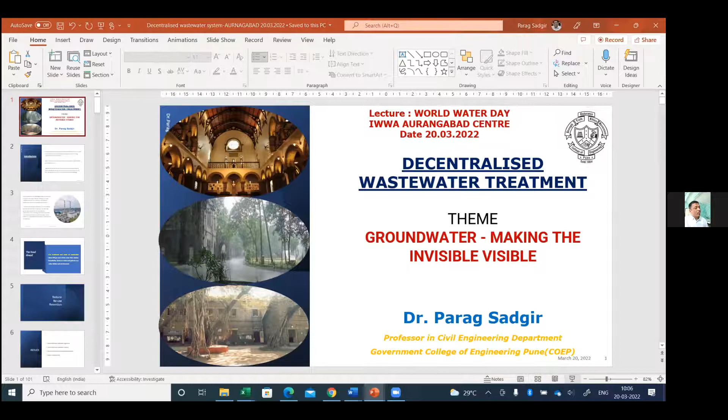He has guided 24 students for ME and MTech dissertations. Total number of journal and conference publications are 132. Such an eminent personality is with us. He also has one patent to his credit.

He has worked as an editorial board member of IWA Journal, and is working as an editorial board member of the Journal of Chemistry and Environment. He has been an executive council member of the Indian Water Works Association since 2006. He is a chartered engineer, life fellow of IEI, IWWA, IWRS, IWRA, IAH. He is also a member of ISTE, IWA, and worked as a member of the Board of Study in Civil Engineering at Dr.

Babasaheb Ambedkar University, Aurangabad. Presently, RRC member of Environment Science BOS of the University of Mumbai and MGM University, Aurangabad. He is reviewer of 7 international journals. He has organized 5 national conferences, workshops, and 1 national level ISTE short-term training program. He has 5 edited books and 1 book chapter to his credit. He has delivered 15 keynote and expert lectures in different areas. He has worked as a session chair for 11 national and international conferences.

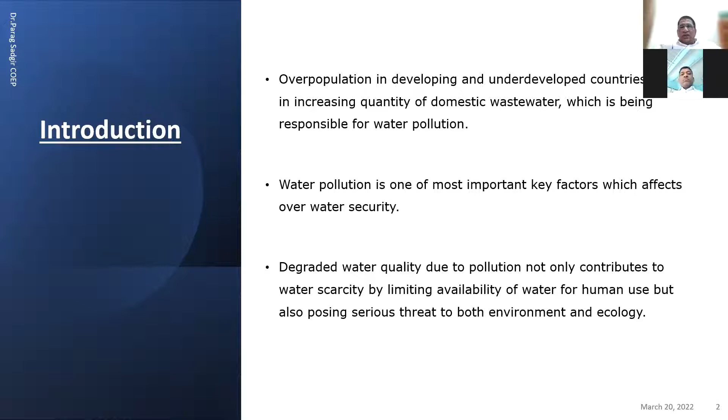Presently, if you see any river, we are able to observe that it is polluted. So we have degraded water quality, and it is also affecting the groundwater resources. So there are various recent technologies we are trying to use for the treatment of that.

Now the new trend, coming from the last 10 years, is to treat that wastewater for non-potable uses like flushing, floor washing, gardening, agricultural, landscaping, construction, road cleaning, recreation, due to the water shortage, so that it will reduce the water pressure on groundwater withdrawal, allowing room for recharge.

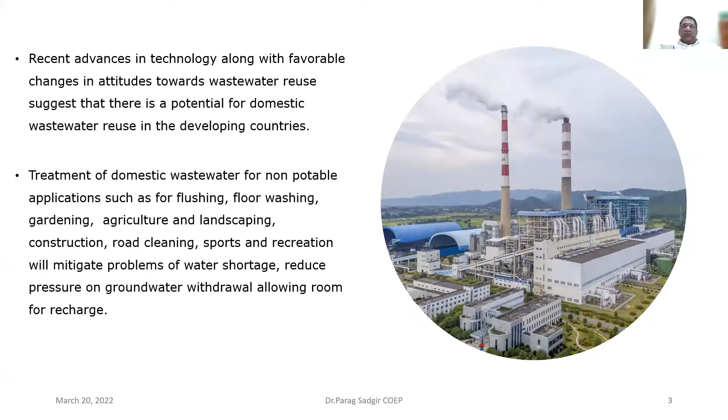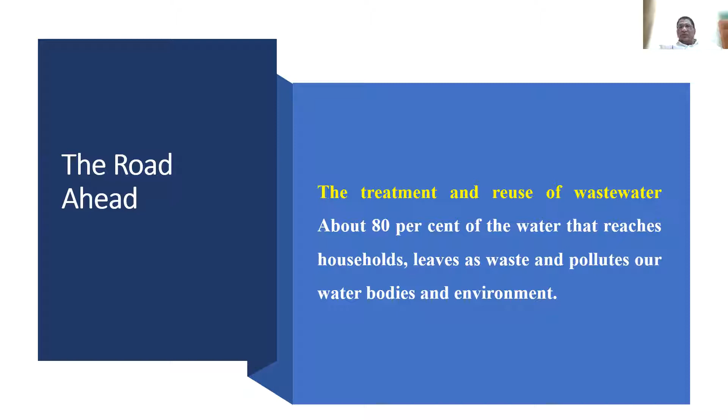If you observe, from the last 50 years the groundwater level has drastically gone down from 50 feet to 300-400 feet. So the treatment and reuse of wastewater is important—about 80% of water that reaches the household ends up as waste and pollutes our water bodies and the environment. So we have to reduce, reuse, and retain.

This is the main fundamental principle. If we follow it, then we will be successful in reducing this pollution and conserving our groundwater sources. In reduce, we have to reduce the freshwater demand in agriculture. If we use this treated wastewater, obviously it will reduce the freshwater demand.

Reduce the freshwater demand in industry. Similarly, if we reuse the treated wastewater, it will also reduce freshwater demand, and reduce freshwater consumption by households.

Practically, for urban areas, we require 135 LPCD—liters per capita per day. Out of that, only 40 to 45 liters are required for potable purposes. Whatever else we are using is for non-potable purposes. For that, we can use properly treated wastewater, which will reduce freshwater consumption.

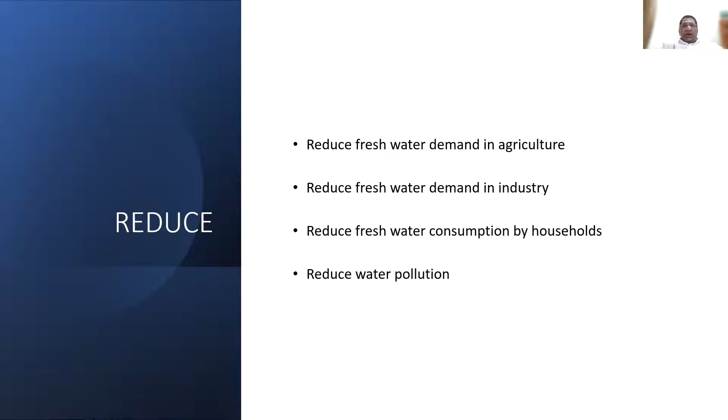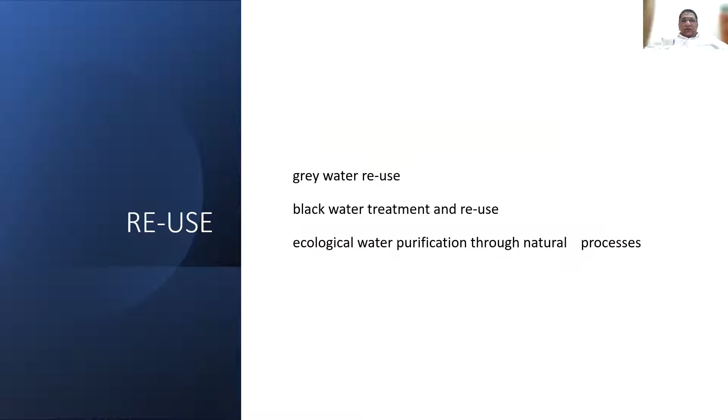Similarly, we have to reduce water pollution. Grey water reuse is also something we have to think about, along with black water treatment and reuse, and ecological water purification through natural processes.

Then retention: upstream investment in natural infrastructure like wetlands and forests. Water storage projects like above-ground reservoirs and rainwater harvesting. Underground aquifer storage and recovery activities. Increase the water retention of the soil so that agriculture will need a lesser quantity of water.

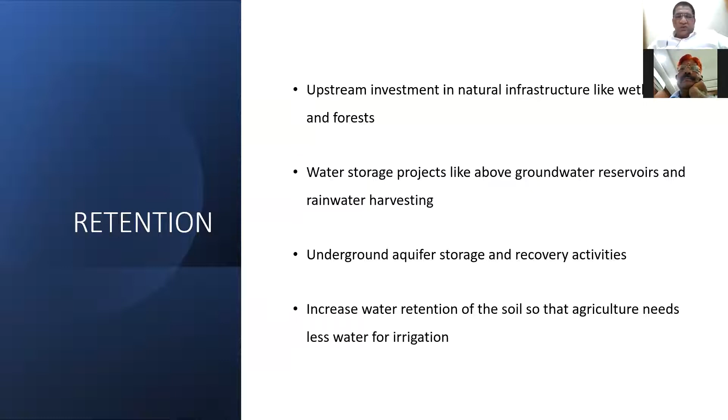So the major factors affecting the wastewater system are population growth. Urbanization has changed from 28% in 1947 to now increased up to 48%, and the day will come when it is more than the rural areas.

So instead of urban and rural, peri-urban population is increasing, which is having the scarcity of all the facilities, just like wastewater treatment or proper water quality. So wastewater composition, discharge, and the enforced effluent standards are now regulated by NGT.

In the last year only, the National Green Tribunal has changed the effluent wastewater quality standard from 20 mg per liter to 10 mg per liter. They have made the standards more stringent so that we are able to maintain the water quality of the rivers. The demand for effluent reuse in urban and agriculture sectors is there, along with location, required qualities, and potential quality.

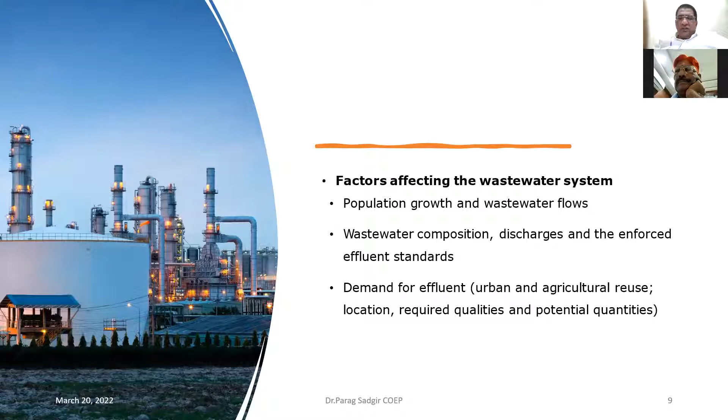The typical composition of untreated domestic water contains main factor BOD at 220 mg per liter, and total solids at 720 mg per liter. Other nitrogen, nitrite, and phosphorus are also present.

As per our standards, now we have to reduce the BOD to 10 mg per liter. This means it is a Herculean challenge to remove or reduce 210 mg per liter from every liter. Similarly, the suspended solids have to be reduced from 220 to 10, again, 210 mg per liter.

Coliform quantity is also high. When we are talking about reuse, we have to remove all these coliforms as well.

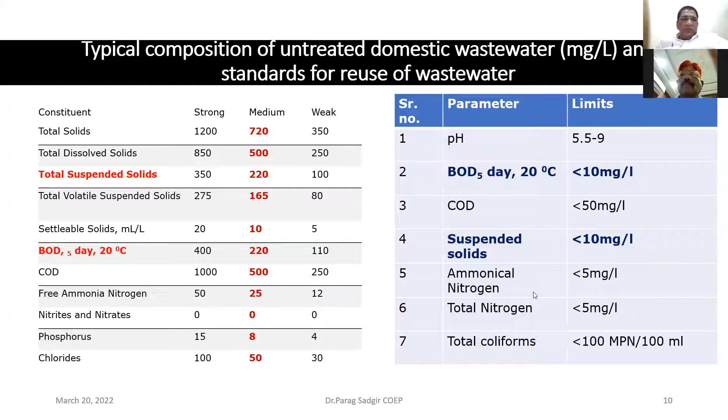So in the conventional treatment system, we are removing organic matter and nutrients, but there is eutrophication, fish kill, odor problems, and more space requirement.

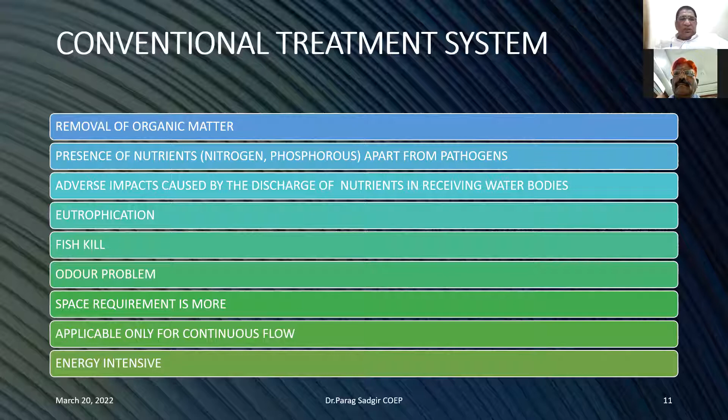Up till now, for urban areas, we are using centralized wastewater systems. This approach involves collecting all the wastewater from the whole area and transporting it. Whatever our drainage systems or drainage schemes are, out of that, more than 65% of the cost goes for transportation of the waste only. The treatment part is just 25%.

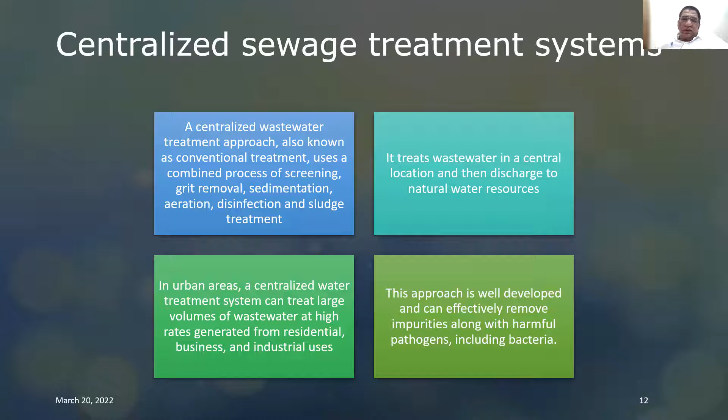Instead, if we talk about decentralized wastewater treatment, we are able to use efficient treatment for daily wastewater flows up to 1000 meter cube or 1 MLD. Now we can go up to 5 to 10 MLD also by using the proper methods.

They are tolerant toward inflow fluctuations, reliable and long lasting. Maintenance of the sewerage system is easy here, with low maintenance cost, and expensive sophisticated maintenance is not required. So the quality of treatment is more efficient

than the traditional system. Treated water can be effectively used within the sector. Groundwater recharge is also possible. Less investment is required as compared to the major centralized systems. System construction results in less environmental disturbance, and system expansion is easier.

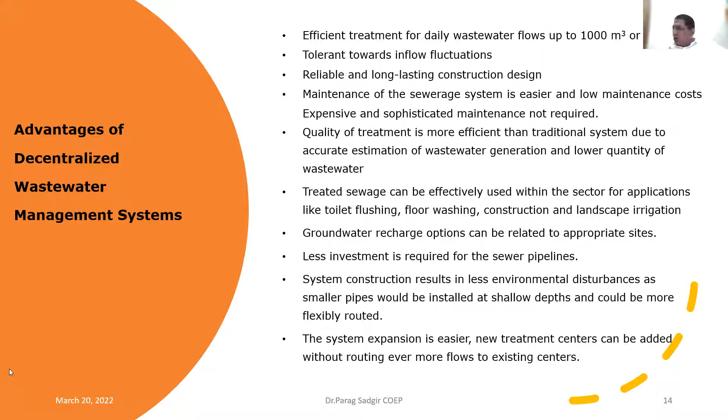So in short, decentralized means we are able to provide treatment plants for small areas. In any urban area, everywhere we provide 10% space reserved for the garden and such things. So these decentralized wastewater systems we are able to provide in the garden area only, and on top of that, we are able to provide the gardens. This helps by using that particular treated water for gardening as well as for roads and other purposes like construction.

The only disadvantage is that a large area is required as compared to the quantity treated. If it is not properly treated, there is a potential threat to groundwater quality. There is no dilution benefit, and the risk of failure is concentrated in that particular area. It requires great awareness and participation of the stakeholders.

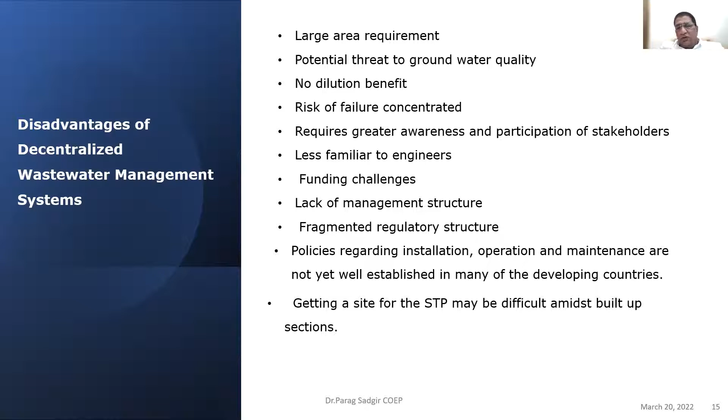It is less familiar to engineers. Funding challenges are there, along with lack of management structures, fragmented regulatory structures, and policies that are not yet finalized. The government is trying to make rules and regulations for this. In thickly populated areas, it is difficult to get a site for the STP, because everybody wants the waste treated, but nobody wants the STP next to them. So that is the problem in urban areas for decentralized wastewater treatment.

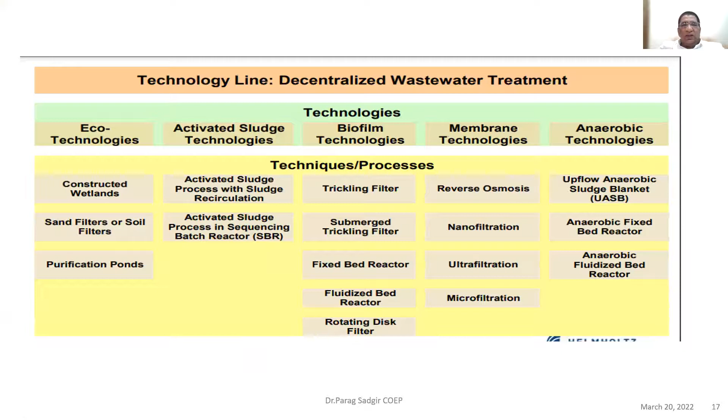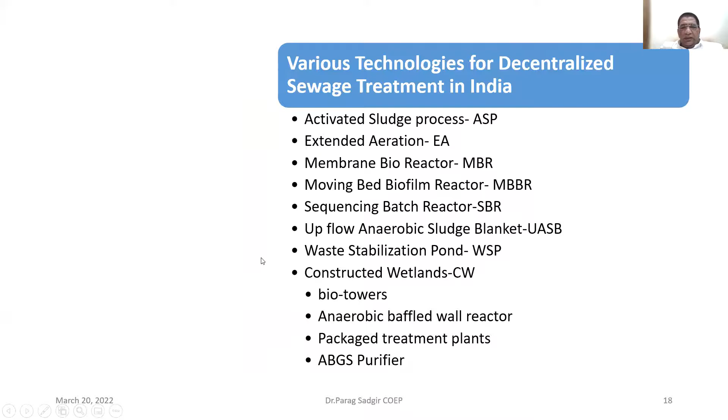Various technologies we are able to use are activated sludge process, extended aeration, membrane bioreactor, moving bed biofilm reactor, sequencing batch reactor, upflow anaerobic sludge blanket, waste stabilization pond, constructed wetlands, biotowers, anaerobic baffled reactors, package treatment plants, and the ABGS purifier.

The very popular one is activated sludge process. It started in 1914 in England, and afterward various modifications have been done in that. If we talk about the activated sludge process, this is the aerobic biological sewage treatment.

In this, there are two types of systems we are using in the secondary. In the preliminary, we are taking the screen, grit chambers, skimming tank, and in the primary, we are using the primary settling tank. And in the secondary, we are having various options.

In the biological, there are two options: one is attached growth system, second is known as suspended growth system. The activated sludge process is the suspended growth system.

In this, we have to supply oxygen, and it requires large electrical energy. Normally afterwards, whenever it is for the municipal corporation or municipal council, they try to reduce this electrical consumption, and they are not using that. So we are not able to get the required quality of effluent at the end.

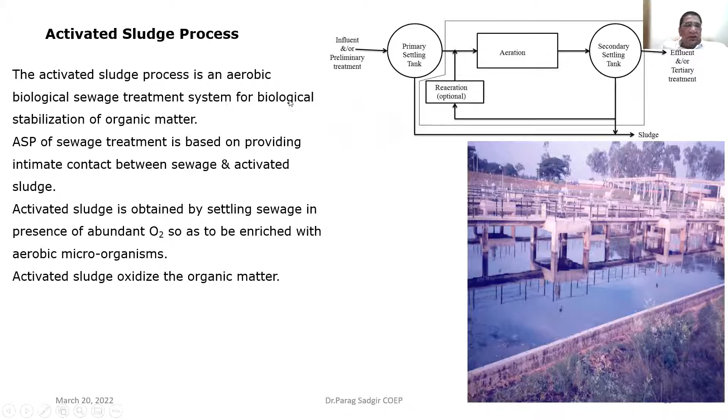It is advantageous if properly maintained and properly used; it gives good effluent quality. The process requires a small area of land, removal of BOD and bacteria is around 90%, and there is low cost of installation. Disadvantage is that sudden change in characteristics will adversely affect the quality.

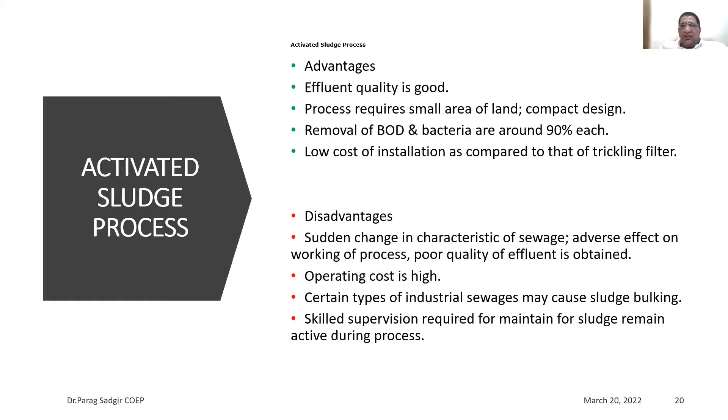Operating cost is high. Certain types of industrial waste may cause sludge bulking, and skilled supervision is required.

Then extended aeration is there, that also we can use.

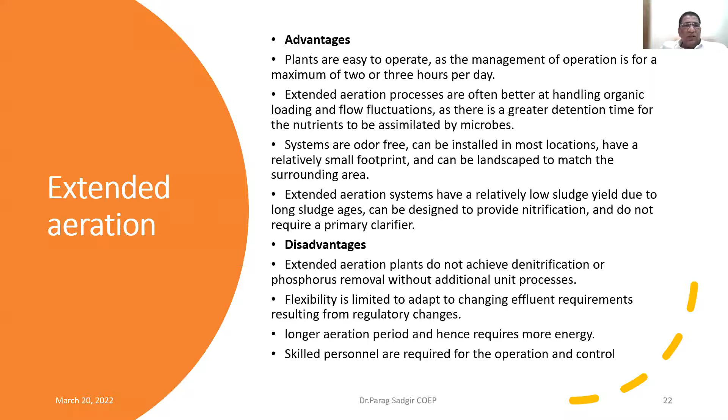Nowadays the popular one is the membrane bioreactor. It requires less space, and it is activated sludge process combined with membrane separation process. We are immersing the membranes in this one, and the reactor is operated similar to the conventional ASP, but without the need for secondary clarifier and tertiary treatment steps like sand filtration.

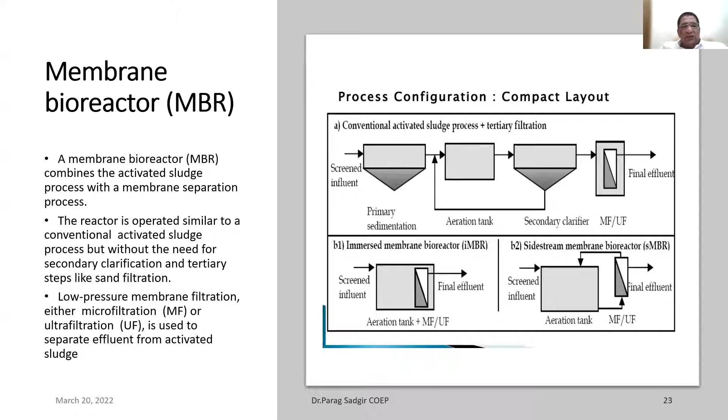So we are using low pressure membrane filtration like microfiltration, ultrafiltration, used to separate the effluent. In this membrane bioreactor technology, we are providing the membrane, and it obstructs pollutants from traveling to the other side, cleaning that one.

Advantage is it eliminates secondary clarification, high volumetric loading, shorter HRT (hydraulic retention time), and lower volume is required. Longer SRT (sludge retention time), and less sludge is produced.

Operating at low dissolved oxygen concentration, and there is potential for simultaneous nitrification, because nowadays the limit given for nitrate is also 5 mg per liter. So it is necessary to treat that also.

High effluent quality: we are able to get 95% COD reduction, 98% BOD reduction, 99% suspended solid removal. Less space is required. It is suitable for reuse after following disinfection and other treatment.

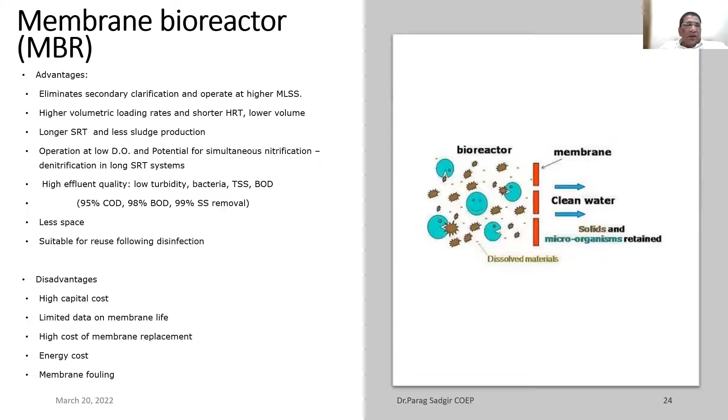Disadvantage is high capital cost, limited data on membrane life, so we have to change the membrane after a certain time. It has high cost of membrane replacement, and energy cost is there.

Normally we are using two types of membranes: one is hollow fiber, another one is the plate membrane.

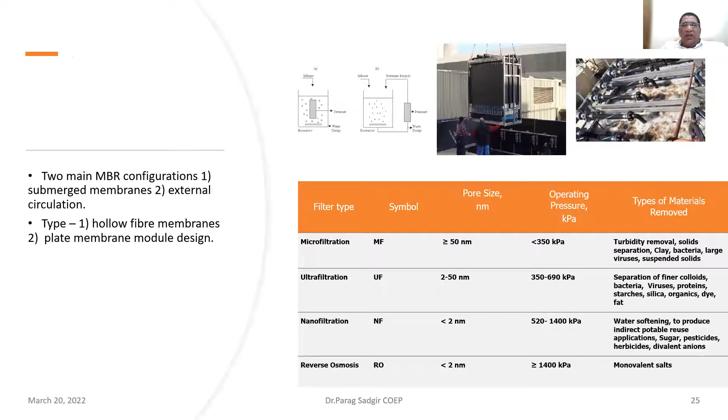After MBR, an alternative is the MBBR, that is the moving bed biofilm reactor. In this particular tank we are putting that media. This is the combination of extended aeration as well as the floating biological reactor, meaning suspended and attached growth system. As in the trickling filter, we are using the attached growth system.

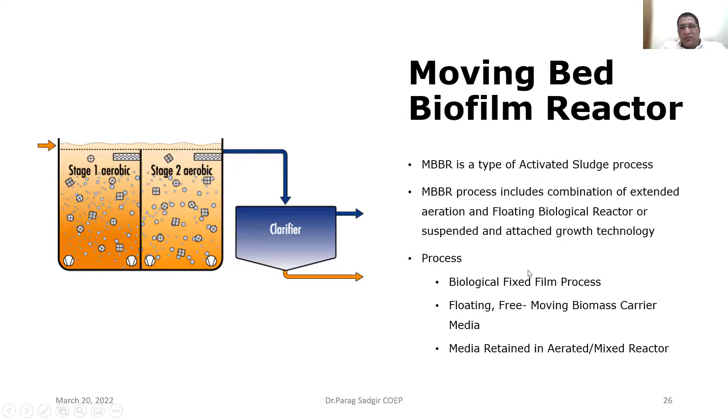So that particular technology is used. This combination is made in the MBBR, moving bed biofilm reactor. We are using biological fixed film process, floating media retained in the aerator. This is the combination in the aeration tank.

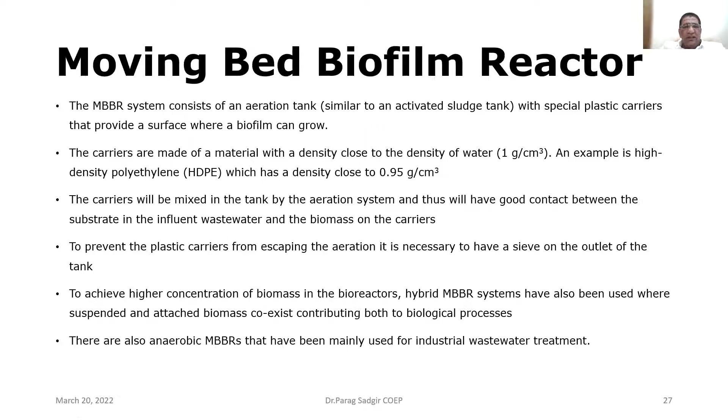In the ASP process, means aeration tank only, we are putting this plastic media, and it is increasing the efficiency of that one. Advantage is higher SRT, which is favorable for nitrification.

It responds to load fluctuations without operator's intervention. Lower sludge production, less area is required, and resilient to toxic shocks.

Disadvantage is manual bacterial monitoring is required, an operator is needed, and some insects may get attracted.

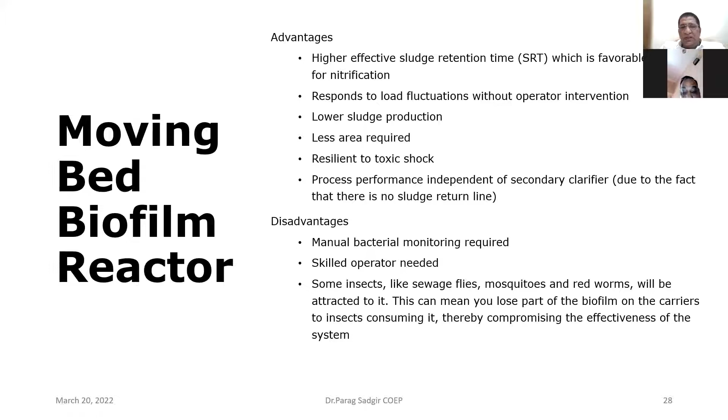Now again, due to the NGT, modifications have been done in these particular effluent standards, that is from 20 to 10 mg per liter, and nitrate 5 mg per liter.

Municipal corporations and municipal councils are trying to modify their existing sewage treatment plant, the ASP, into a sequencing batch reactor, because in the same construction they are able to double the capacity due to increase in population. Nowadays as population increases and urbanization increases, land availability is very less.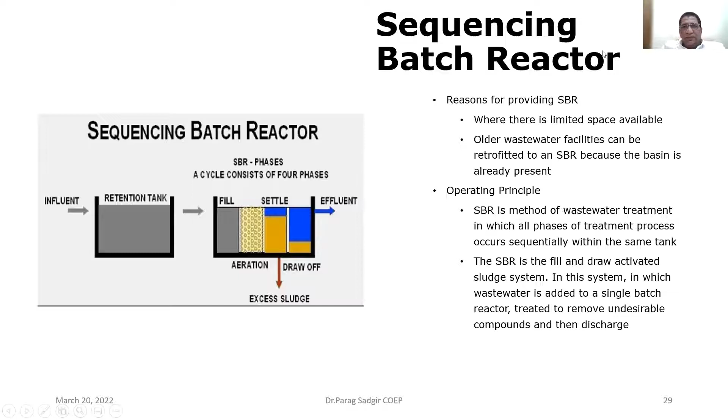In this particular system, first we fill the tank, the particular compartment, then we provide aeration for the particular period. We allow it to settle and decant. This is a batch process - fill, react, settle, and decant - we are able to treat the wastewater.

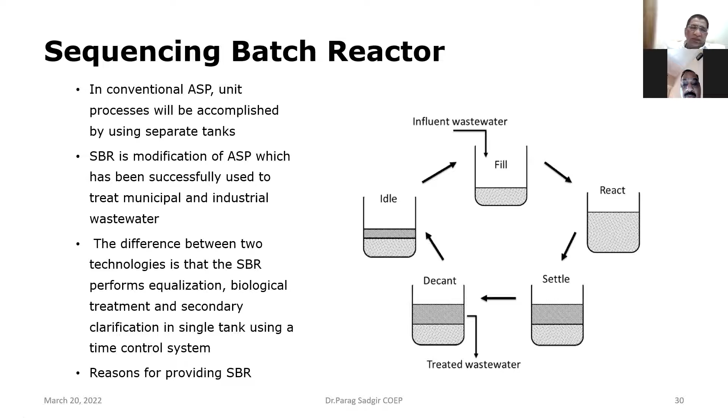The difference between these two technologies is that SBR performs equalization, biological treatment, and secondary clarification in a single tank - in the same aeration tank we are able to provide all of these using a time control system. The advantage of SBR is equalization, primary clarification, biological treatment, and secondary clarification.

SBR requires small space, it is a controllable reactor time, and has minimal footprint with high nutrient removal capabilities. BOD removal efficiency is 85 to 90%.

But the limitation is that it requires a higher level of sophistication. If we want to provide automation, then the sensors and all that cost will increase. Higher level of maintenance is required, and potential plugging of the aeration devices is also a problem.

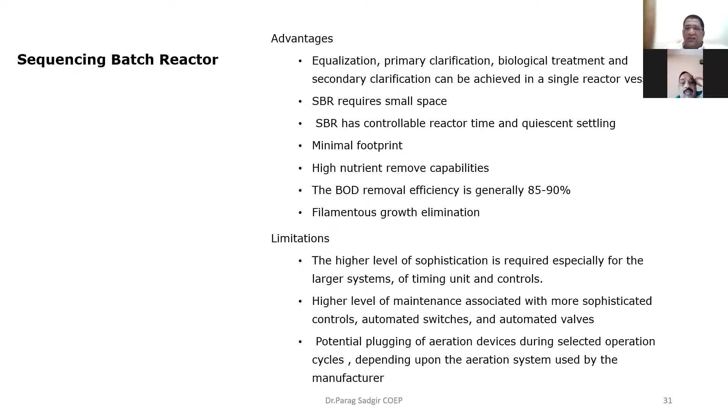Then UASBR is there, that is the anaerobic process used if we want to produce energy by collection of biogas. Nowadays Praj Industries and other industries have developed models so that by using this, they are able to produce electrical energy as well as CNG.

That is compressed natural gas. Up till now, the concept was that whatever we are doing in wastewater treatment means we are wasting money, because the municipal local bodies are not getting any return from that. But by using technologies like UASBR, they are able to get some returns in terms of electrical energy or CNG.

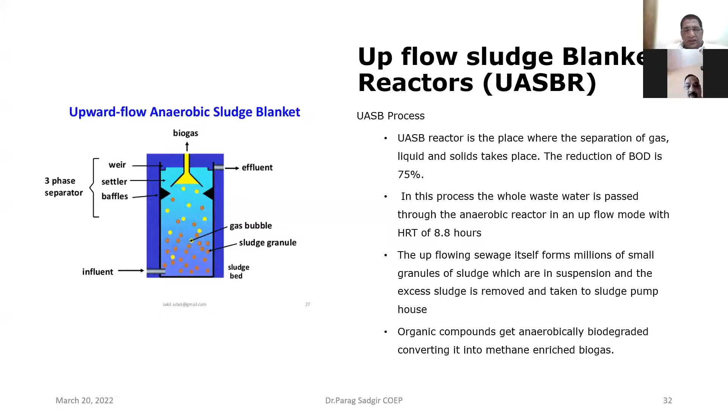So due to that, it is getting more popular day by day. The advantage of UASBR is it produces easily dewaterable excess sludge, low energy consumption, absence of noise and odor nuisance. It is a proven technology with low initial investment and maintenance cost. Methane-rich biogas production is there, and it produces enriched nutrient sludge which can be used as fertilizer.

A longer startup period is a disadvantage, along with lower performance at very low loadings. It is difficult to maintain the UASB because we have to maintain pH, alkalinity, and temperature properly. Only then are these methanogenic bacteria able to produce maximum efficiency of biogas, meaning methane gas. We also have to provide separators so we can collect the methane gas separately.

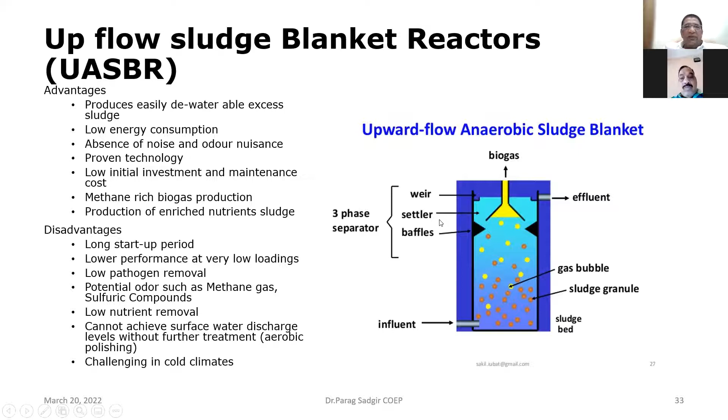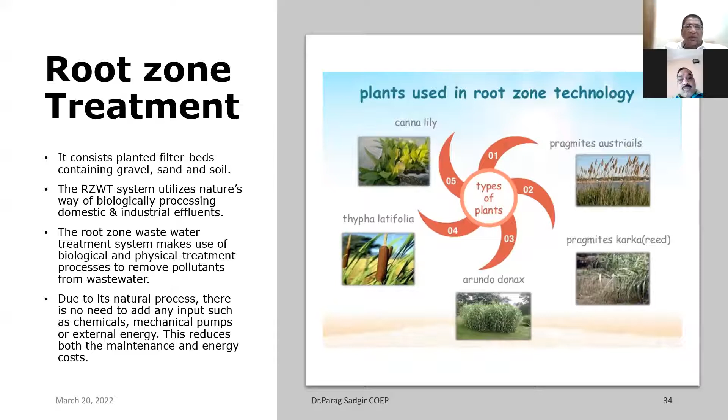Then in decentralized treatment, we are able to use root zone treatment. If more land is available, this type of treatment is preferred. It is a natural process with no mechanical or electrical part. Its retention time is more. It is settling, anaerobic baffled - we do pre-treatment, then anaerobic baffled reactor, anaerobic filter, and planted gravel filter.

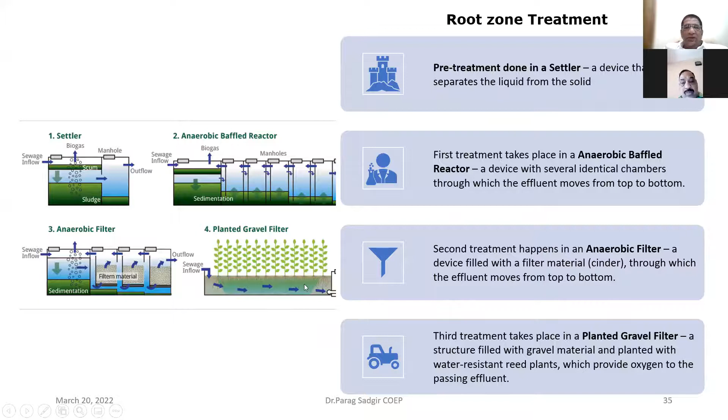There are comparative advantages: capital cost is less, construction bed is simple, system requires little or low maintenance. It is a robust process, able to withstand, and gives consistent quality of treated wastewater.

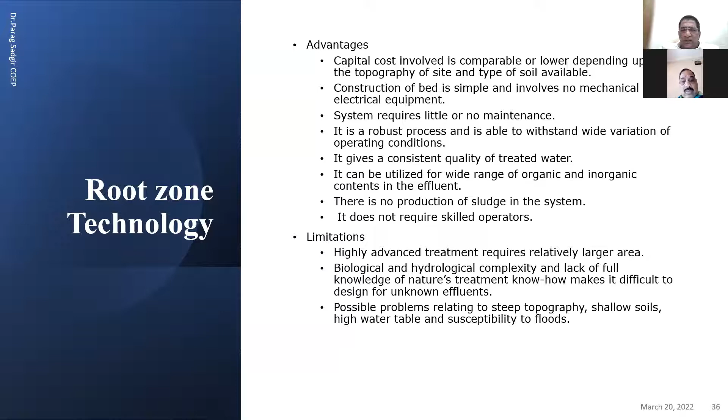The limitation is that highly advanced treatment requires relatively larger area, and knowledge of nature treatment know-how is difficult to design for unknown effluent. For domestic sewage, we are able to make that work. Possible problems include steep topography, shallow soil - it again depends on the infiltration rate of that particular area.

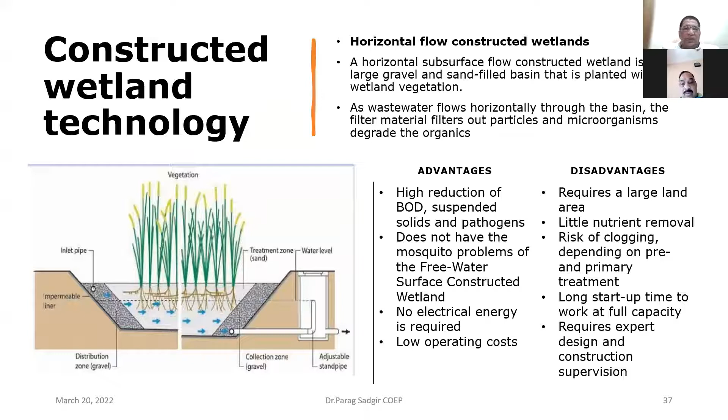Then we can use constructed wetland technology also for that. There are again 3 types: surface, subsurface - subsurface, and surface.

In College of Engineering Pune, they have actually implemented this particular technology, the NaWaTech DST supported project for this. This is an anaerobic system as a gravity flow system, which does not require pumping. They have provided this vertical flow wetland of capacity 140 cubic meters, and the treated wastewater is used for gardening as well as flushing in the hostel blocks.

It is user-friendly, low cost operation and maintenance, with consistent treatment performance. It was established in 2016, so now 5 or 6 years have passed. No skilled operator is required, no chemical is required, no electricity is required.

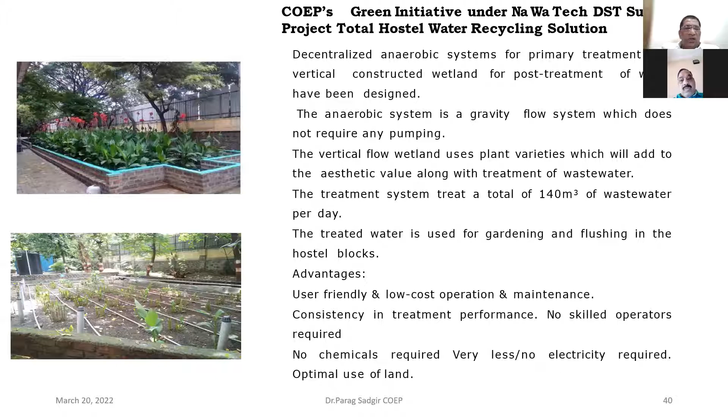Then I have developed one technology that we have given the name ABGS. We have got the patent for that.

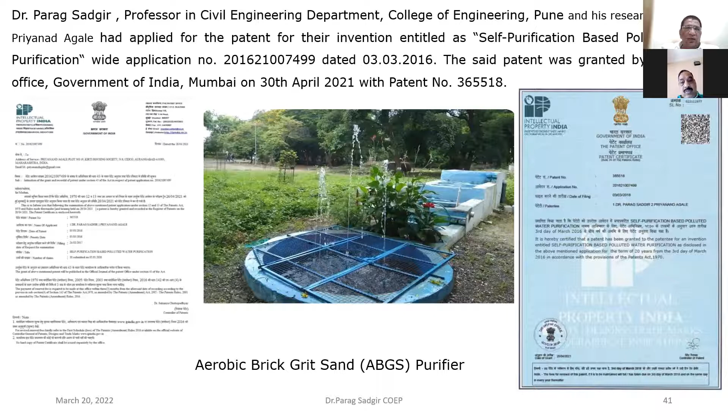In this technology, we are particularly using these components, that is the equalization. We are using locally available media, that is brickbat, grit, sand, and charcoal, plants like Canna indica, and aeration is done.

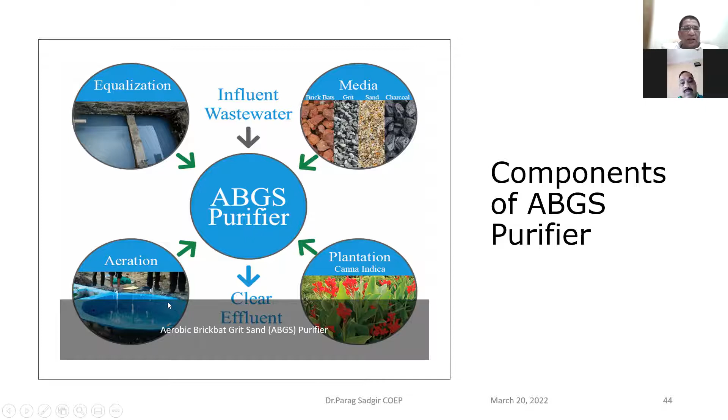In this, we are able to use brickbat, sand, hydra plants, coconut coir, neem coal, and grit. We have tried these various media and found that brickbat and sand are giving the good results.

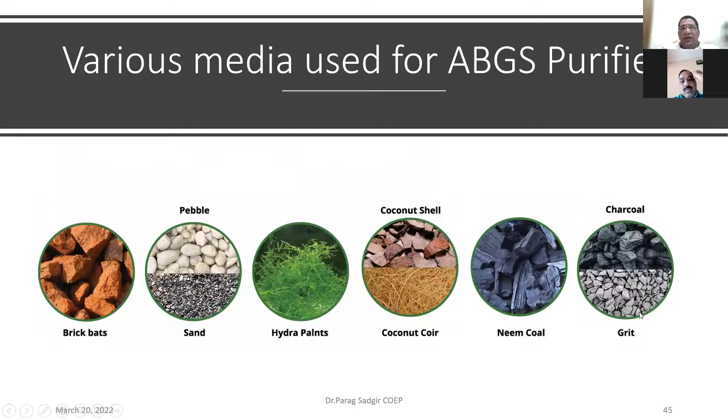This is the pilot scale model we have, and we are able to get this quality, as you are able to see in the picture. This is the actual pilot plant we have established in College of Engineering, Aurangabad.

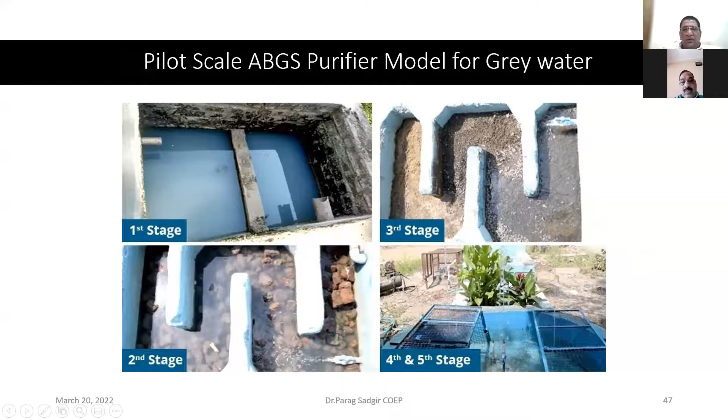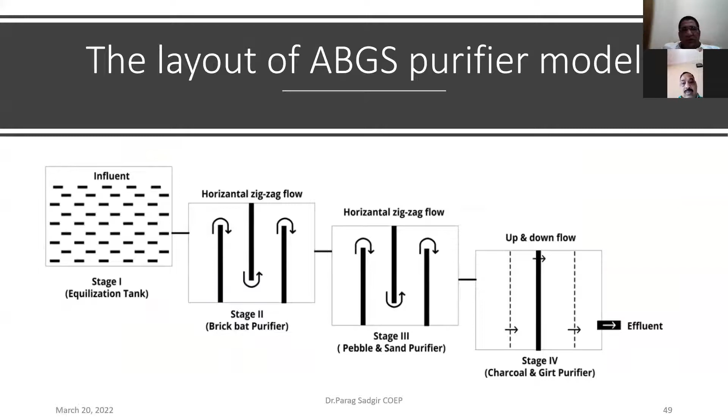The same system we can use for the nalas or streams or small rivers, so that we are able to purify that particular wastewater.

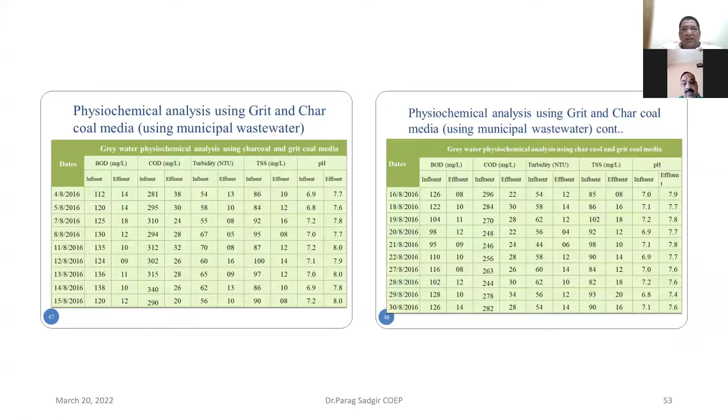So these are the results we have found out. This work is done by Mr. Agrawal in his PhD work. BOD removal is 89%, COD 90%, total suspended solids 85%.

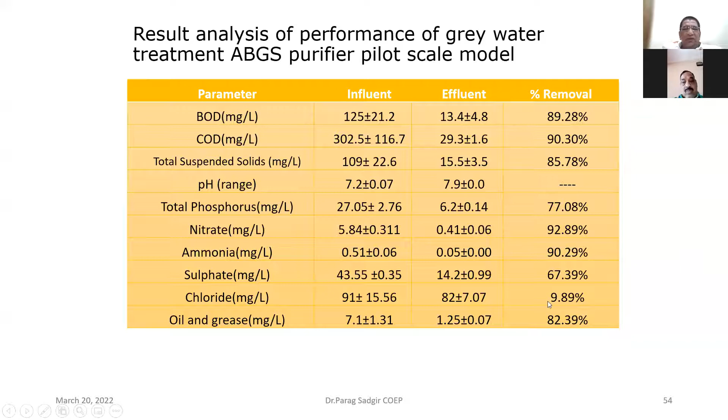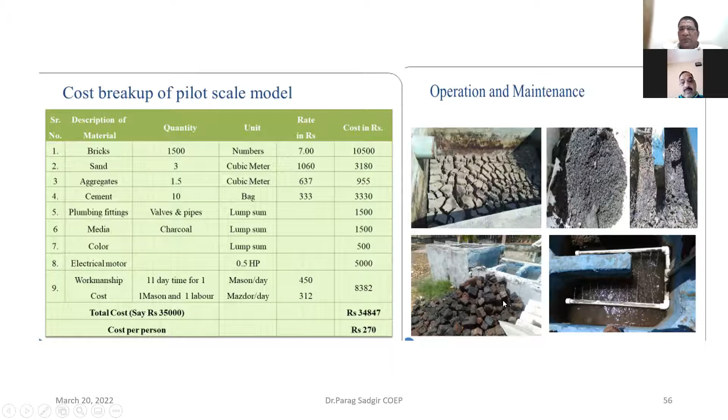So we are able to get good results in this. For operation and maintenance, after 6 months we only have to remove whatever waste has collected from the equalization tank, and we are able to form bricks from it, which we wash only after 6 months and then reuse. Similarly for the grit and sand also.

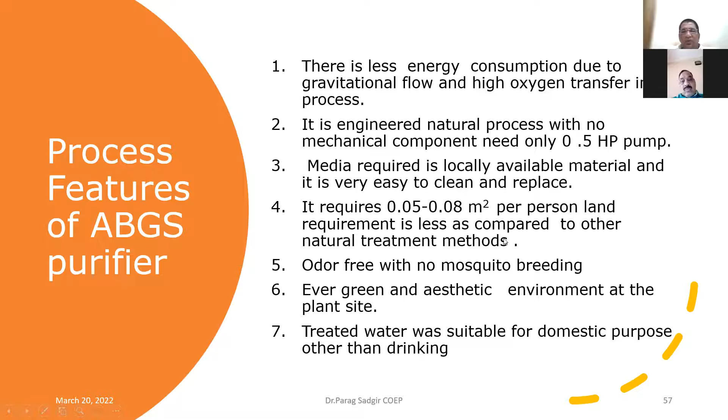There is less energy consumption due to the gravitational flow. We require only a 0.5 HP pump for electrical energy, and no mechanical part is there. Whatever media is required is locally available, and area requirement is also less, that is 0.05 to 0.08 square meter per person. Land requirement, odor-free, evergreen aesthetic environment is there. The treated wastewater is suitable for domestic purposes like gardening and other than drinking purposes.

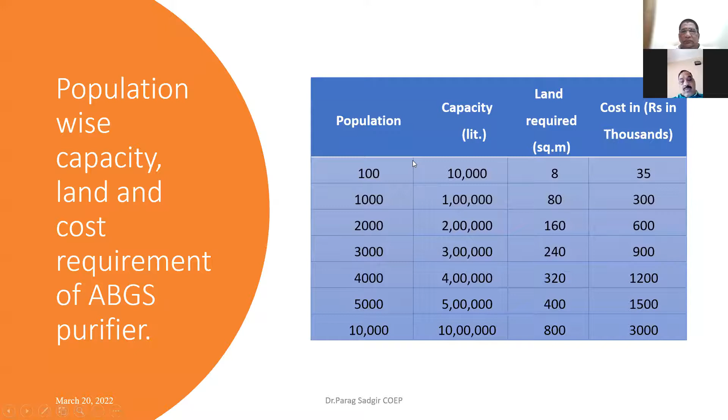The performance is compared with all these. Though it is removing in the primary and secondary stages, we are removing 90 to 99%.

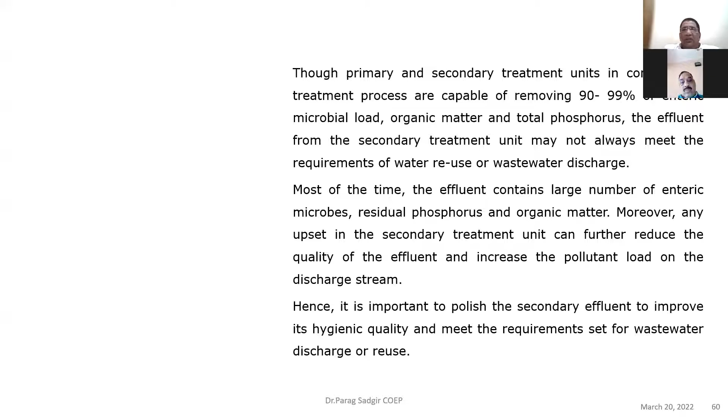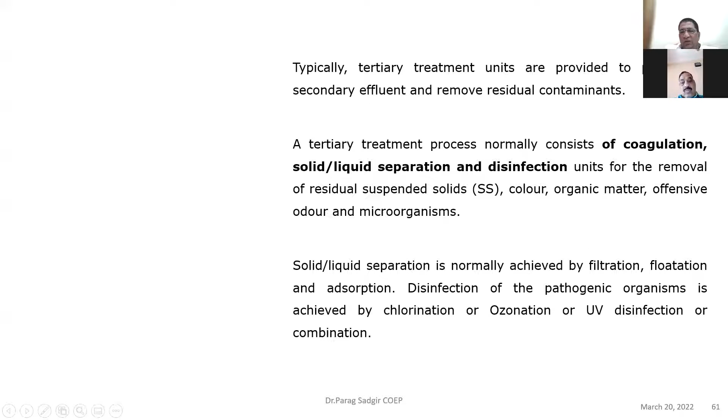If we want to reuse that water, it is necessary to give tertiary treatment. In the tertiary treatment, we have to give coagulation as well as solid and liquid separation. Disinfection is required, so we are using filtration, flotation, and adsorption. Disinfection is done by chlorination, ozonation, and UV disinfection.

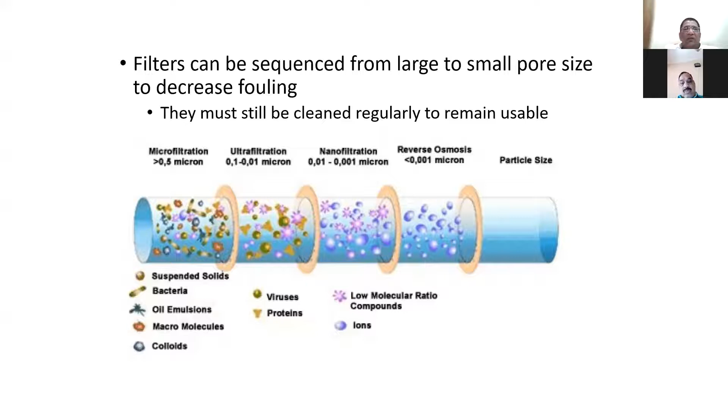So whenever we are using separation, if the suspended solids are greater than 0.5 micron, we have to use microfiltration. If it is between 0.1 to 0.01, we use ultrafiltration. If it is 0.01 to 0.001, we use nanofiltration. And if it is less than 0.001, then we have to do reverse osmosis. Depending on the solid size, we can select which filtration is required. This chart shows which treatment to give and when.

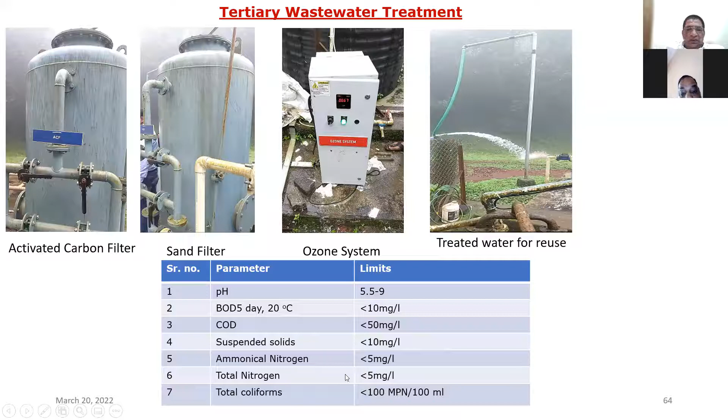BOD is less than 10 mg per liter, COD less than 50 mg per liter, suspended solid less than 10 mg per liter. Ammonical nitrogen is also less than 5 mg per liter. Total nitrogen is less than 5 mg per liter, and total coliforms are also less than 100 MPN.

So when we are selecting the technology, which technology we can use, we have to consider cost, operation and maintenance, advantage, disadvantage, relative cost, and cultural acceptability and suitability. So we have to think about these factors.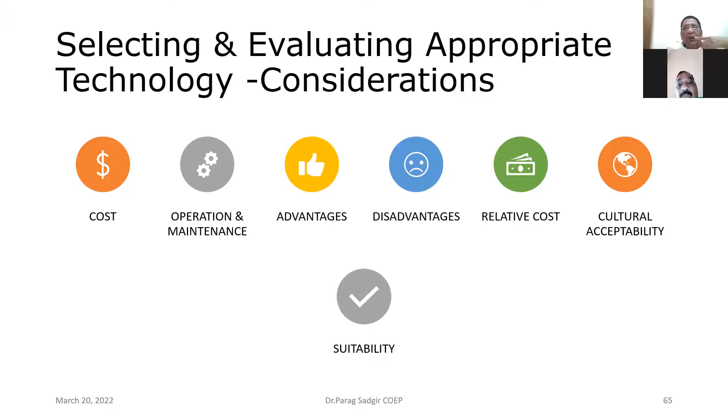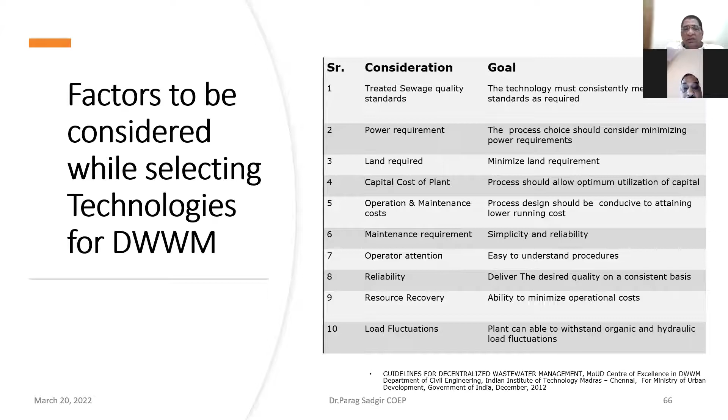Whenever we are thinking about this, what is the quality of treated wastewater we require, what is the power requirement, what is the land requirement, what is the capital cost available, what O&M we are able to give, what is the maintenance requirement, how we are able to maintain it, and operators' attention, whether it is easy to understand or not, whether it is reliable or not, whether resource recovery is there, and the load fluctuation, whether it is able to withstand load fluctuations or not.

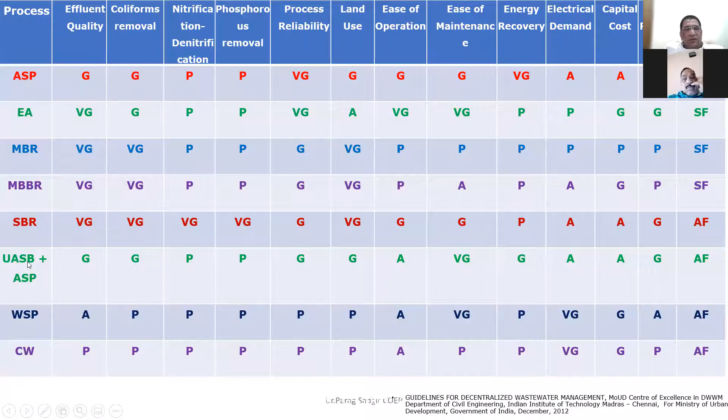So this is one survey done by the ministry, our government of India, and they have given guidelines for decentralized wastewater treatment using these technologies: ASP, that is activated sludge process, EA is extended aeration, MBR is membrane bioreactor, MBBR is moving bed bioreactor, SBR is sequential batch reactor, UASB is upflow anaerobic sludge blanket, WSP is waste stabilization pond, and CW is constructed wetland. They have given the quality, qualification, and all that.

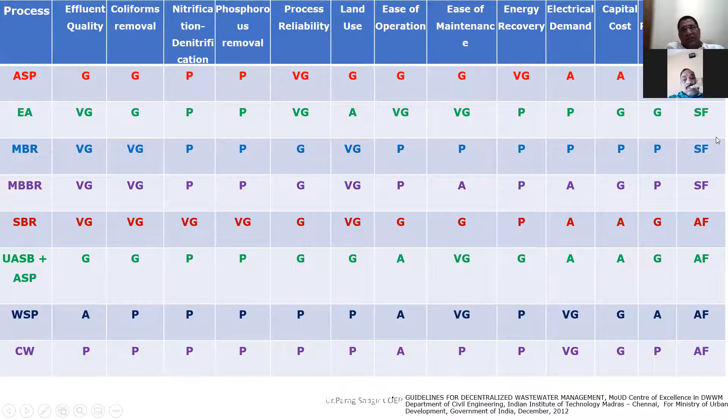And most important is the cost for the various technologies, which is not available in any book. What are we getting in terms of performance after the secondary treatment? What we are getting in ASP, MBBR, SBR, UASB, and MBR. As per the present norms, we are able to meet standards only in SBR and MBR.

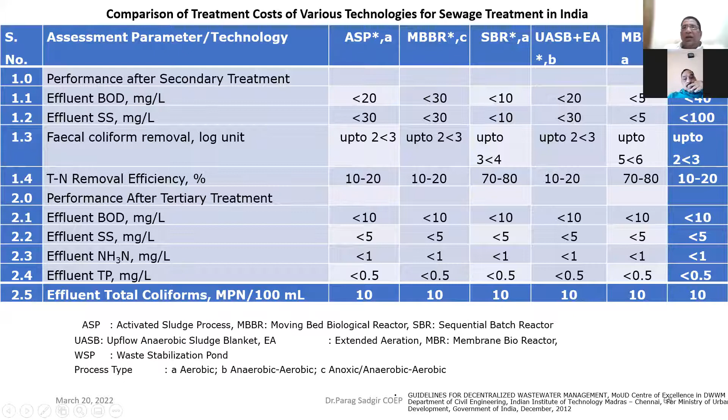If you talk about the capital cost, we are able to see that ASP, MBBR, SBR, and UASB are similar to each other. But in MBR, it is 5 times more. WSP is half of the ASP. So this is the average capital cost we can talk about.

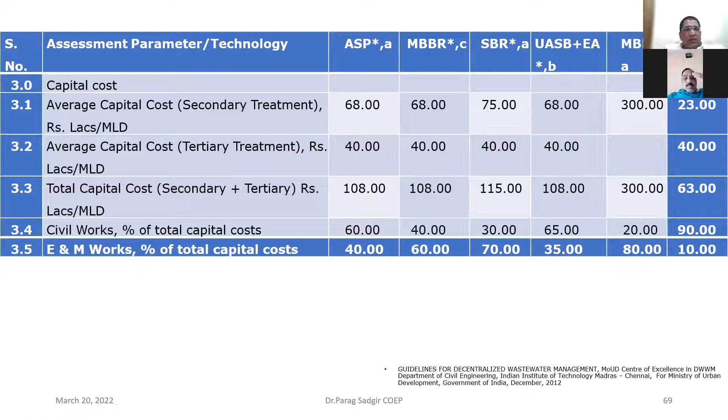Area requirement: the average area requirement is 900 meter square per MLD. For the MBR, it is half. For the UASB, it is more, and for waste stabilization pond, it is 6 times that of the ASP.

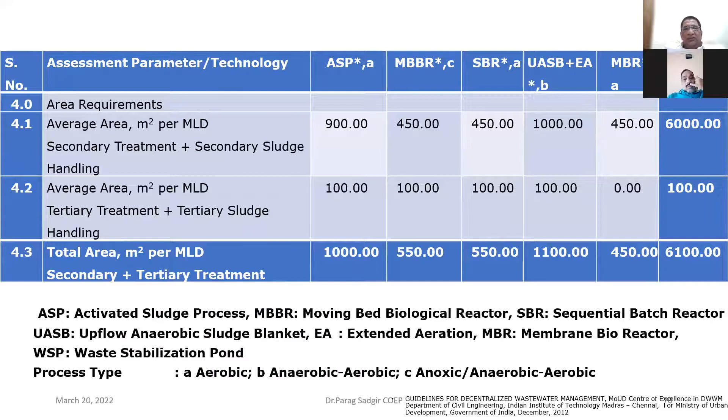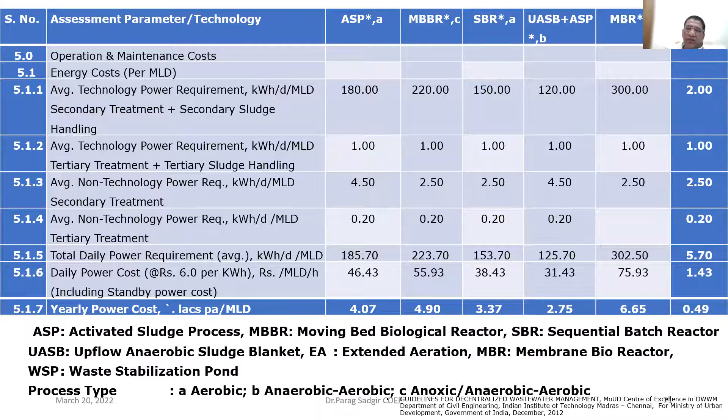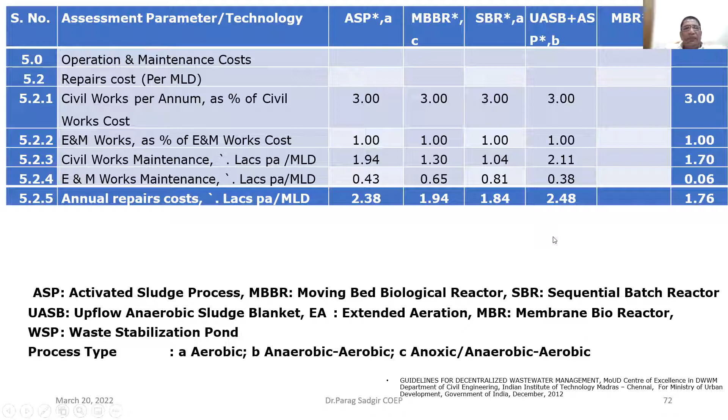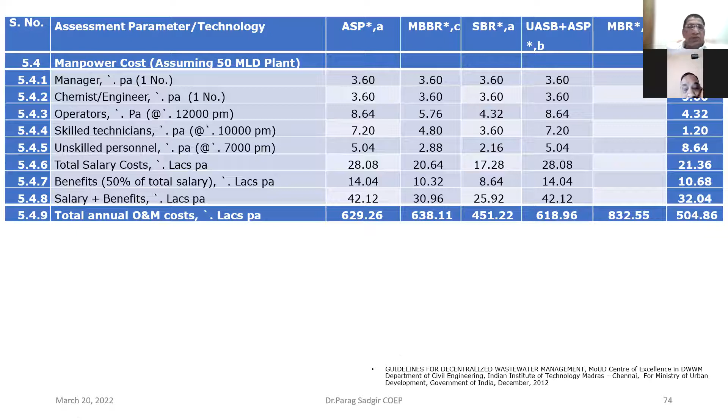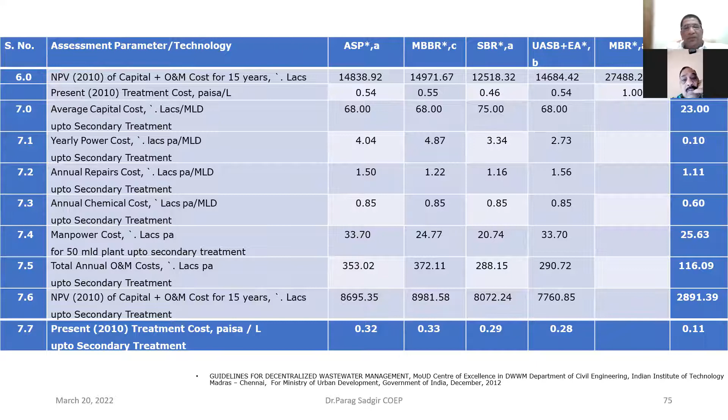So the present treatment cost, if we talk about paisa per liter up to secondary treatment, it is around 0.32. So these are the references for the various guidelines and all that. Thank you.